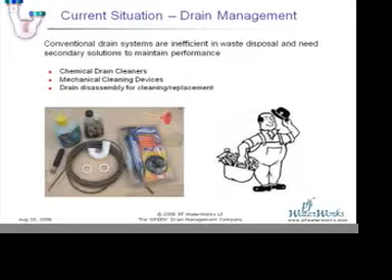However, can we imagine that traditionally, even with 2.5, 3 gallons a minute flow rates, we've had these problems? How can we make a statement that we go from those to 1 gallon a minute flow rates, that there will be no problem or that there will be no increase in problem? So what we're trying to raise here is awareness and an issue that we think will cause a bigger problem in the future. We just don't have enough data points because the reducing of flow rates is a recent phenomenon.

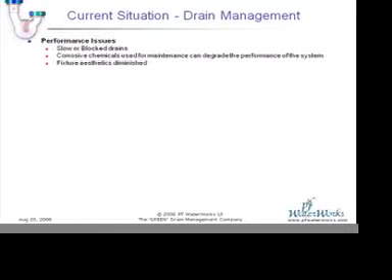If you look at the traditional drain management, we all suffer from slow or blocked sinks. We all suffer from corrosive chemicals that hinder the performance of the system. If you look at the safety and environmental issues that we all deal with on a daily basis, there is contamination of gray water, which results in challenges to the water treatment facilities, which means you need more energy to treat water because you have more contamination. There is damage to plumbing and fixtures, which means there's cost associated with those.

Potential kids and pets poisoning, potential burns to eyes and skin, inhalation injuries, and these are all established data. If you look at the National Safety Council, you have these data points that there's tens of thousands of people that get injured annually and get hurt with chemical cleaners. With mechanical cleaners, we get exposed to contaminants.

When we disassemble a drain, the whole concept of the drain or P-trap is that you don't have to disassemble and you don't ever have the sewer gases coming back in because you want the seal. But you disassemble, and for that 15 minutes to an hour to 2 hours, whatever it takes for you to go buy one and replace it, there is actually not a water seal in there, and therefore the whole property is getting contaminated with sewer gases. All of this is not cheap.

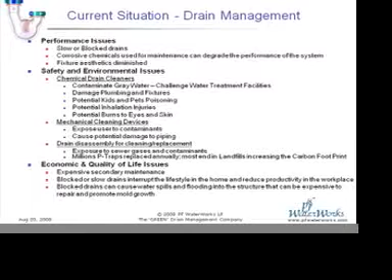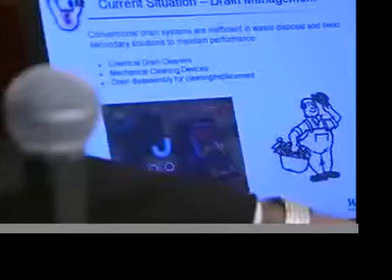When we look at a P-trap, the P-trap may cost only $3 or $4. But when we look at the total cost of ownership and maintenance, including the mechanical equipment that we buy, the chemicals that we buy on an annual basis, the plumbing services that we rely on, and our own time and frustration that we spend on these things, it's very, very expensive for an average consumer.

Yesterday we looked at the direct linkage between energy and water. And there's about 8% of energy usage in the US directly linked to water in some form. So the focus is reduce the flow rate at the supply line, and that way we can conserve water. That's what we've all seen. Here are samples of low flow rate faucets and toilets, and that's the technology in there, which is great. We are able to get a direct linkage.

However, when we look at it in the context of the existing drain systems and drain management, now that we have reduced the water, there is potential that we've caused another problem, and therefore we may be giving away some of the efficiencies that we gain by reducing the flow rates by increasing the use of chemicals, mechanical treatments, opening the traps, etc. So that's a concern we are trying to raise, that the system needs to be looked at in totality, not just at the supply line, but also at the disposal line and the waste management line.

We've looked at the standards that have been developed by LEED, NAHB, EPA, WaterSense, and most of those standards focus on a lot of issues around environment and water conservation, but they have kind of left out the area of what happens after you've reduced the flow rate and the water's come down the sink.

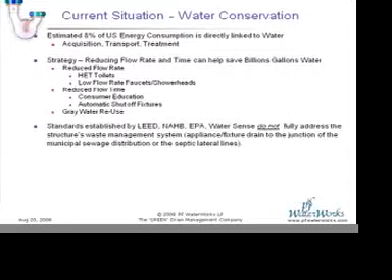What happens after that. And there is no standard provided for products to be developed around that area so we can improve the efficiency of the system. Here's a hypothesis that we are making.

We're making a hypothesis that when you reduce flow rate, there is a negative impact to the efficiency of the system. And the reason is that in the system, the first component is a P-trap, which we all are aware of. But then further down the line, the waste arm, the pop-up drain, and then further on, until you get to the main drain pipes, there are several portions of the components which become more inefficient in presence of lower flow rates than the higher flow rates.

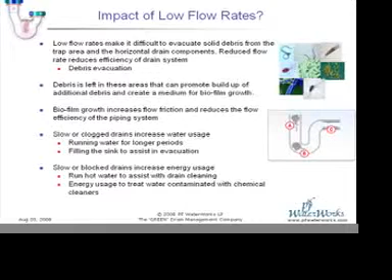Traditionally, when you have a slow or clogged sink, we pour more water, or we fill up the sink and try to clean it, or we pour chemicals. And all of that basically is giving away some of the advantages that we are getting from reducing the flow rates. So here's an experiment that we performed to prove the point that if you were operating at 2 gallons per minute, and this is the outlet coming from a waste arm going into the wall from a P-trap.

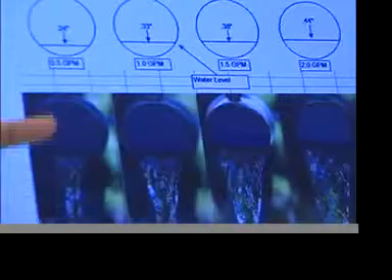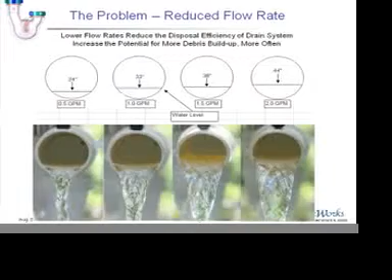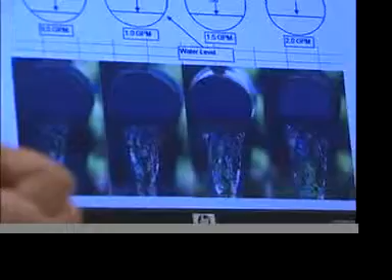If you're operating at 2 gallons per minute flow rate from your faucet, you can see the amount of water that's coming out in terms of its height and its width as a ratio of the line. When you go from 2 gallons per minute to 1.5 gallons per minute to 1 gallon per minute, that width and height goes down by about 1/3, which basically means what? Our belief is, based on this experiment, that if there was a debris that could have easily flown away in this kind of situation,

it could get held back, which basically means that there is higher inefficiency introduced into the system, and our dependence on secondary maintenance techniques of using chemicals or using secondary maintenance goes up, which is again compromising the gains that we are getting on the water conservation side.

So to prove this point, we did some more tests, and the first test was we poured a cup of carrot peels in a traditional 1.5 inch P-trap, in the sink system without going through the garbage disposal. And what we found is that not one carrot peel came out, even though the water was still flowing at a reduced flow rate; all the carrot peels got stuck in the trap.

And what that means is that they would stay there, and over time they would degrade and then become contaminated and then become a clog. We have no way to see what's going on there. We have no way to fix it unless we see the symptom on the surface when you have a lower flow rate in the sink.

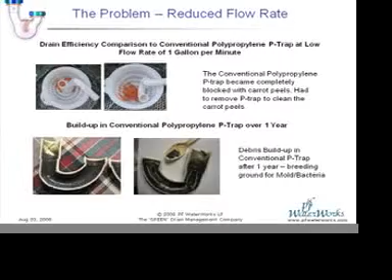We also notice that if we put a new P-trap in a sink, and this is after 12 months, just the traditional debris that's going through it, the toothpaste and hairs or whatever, forms a biofilm, and then there are contaminants built there, and you have bacteria and molds and mildews and all those kinds of things getting built up there.

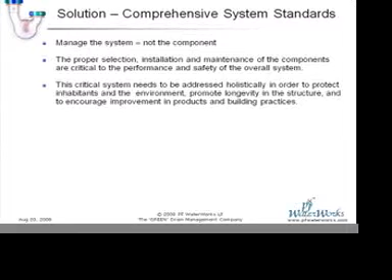So in our opinion, there is a need for managing the total system, not just at the component level, but at a system level. We believe that if a holistic view is taken, then there will be improvement in impact to the environment, there will be better life of the structure, and it'll improve the products that are installed into the building. There are different system attributes that can be addressed.

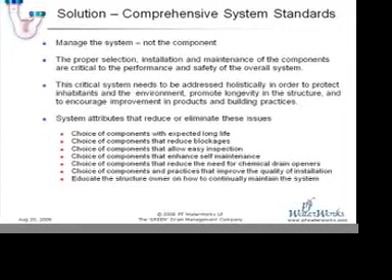Some of them can be just addressing the life of the components that we're using or the materials that we use. Some of them can be related to reducing blockages. Some of them can be related to improving inspection capabilities, self-maintenance, reduction in usage of chemicals, and so on. However, like I said before, there are no standards or guidelines available that encourage anybody to develop products around these areas.